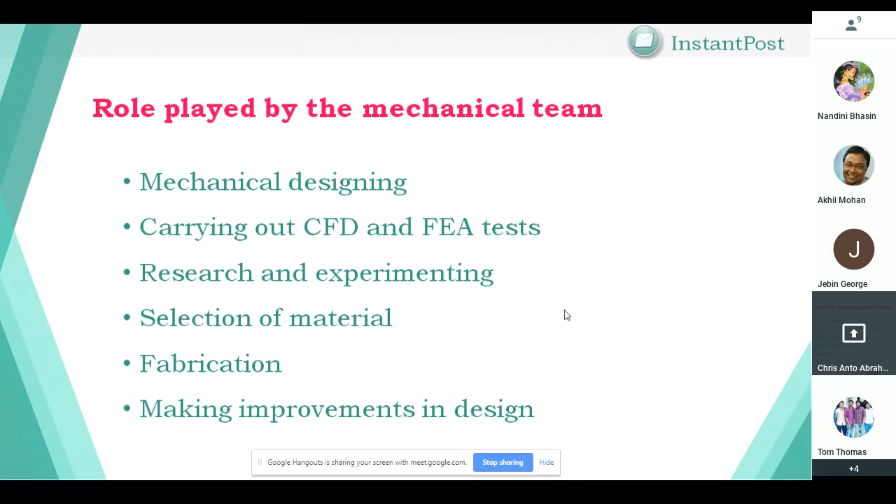Now, as Akhil explained, let's look at the mechanical ongoing projects, which include the bound print category and loose print category. Now, the machines that we are focusing on in the bound print category are the nozzle, mold structure, binding machine, and trimming machine. These machines will be explained in detail by the concerned member working behind it.

So that's the bound print category. Then there's the loose prints category. Here we have the kiosk and the CFD simulations.

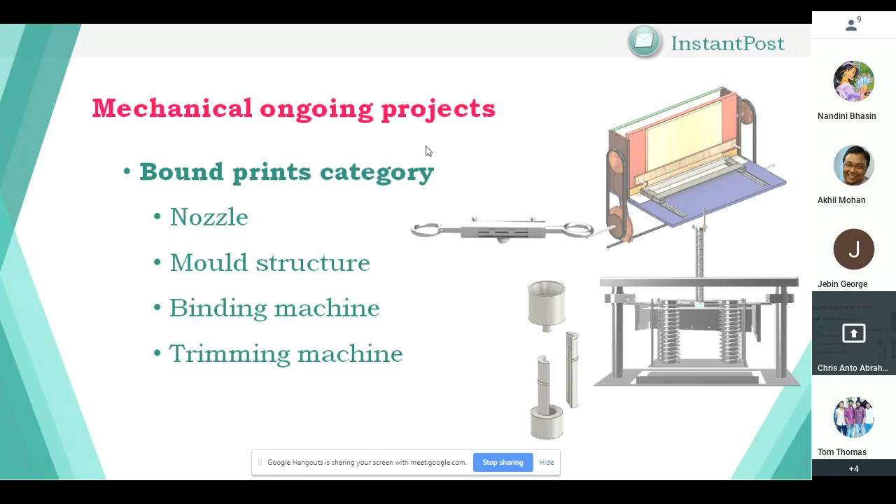So now let's go to our first machine. That would be the nozzle, and Tom would be the best person to talk about that. So let's hear from you, Tom. Thanks, Chris.

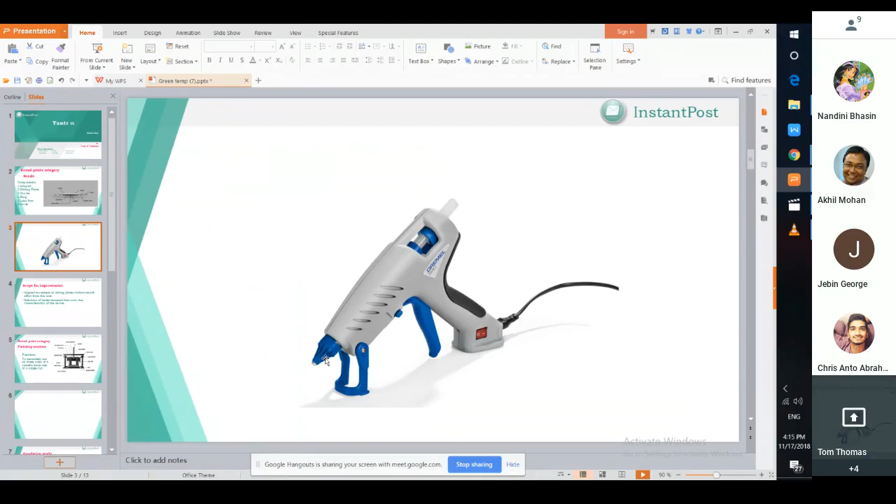As you can see on the next slide, this is the standard glue gun that we are using. There's only a single nozzle that comes along with it, and the nozzle cannot be used to have a different width size. That's where our product comes into picture.

These guides can move on both sides, and these rings actually control the movement of the guides, which can easily be done with the help of your fingertips. This inlet port is connected to the inlet of the glue gun, and that's how this whole mechanism actually works.

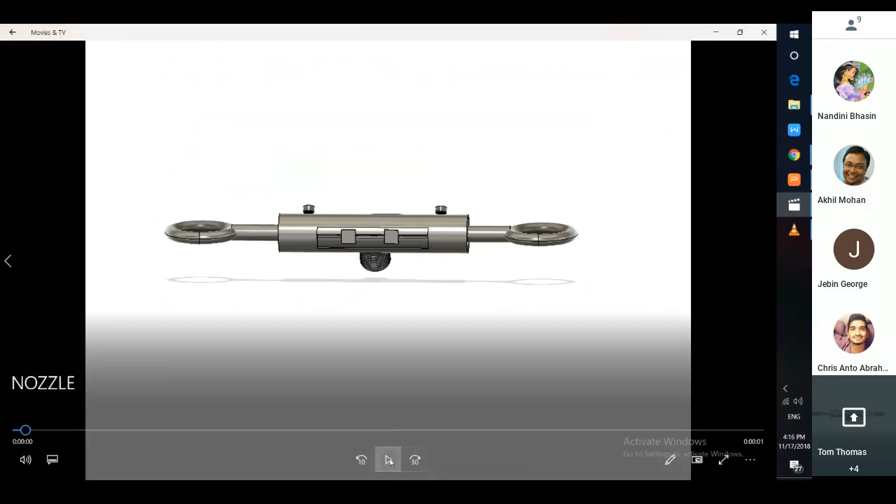Now I'll show you just an exploded view of the nozzle. Let's go on to the next slide.

That's the scope for improvement: aligned movement of sliding plates without much effort from the user. From the slide, you can see the user needs to use two fingers to move the slides in both directions, so that the guides move along with them. Reducing that would be our next objective, along with selection of a better material that suits the characteristics of this device.

Why we need to select a better material is a choice, because we need the glue to be in a molten state, and once the molten glue enters the adapter, the adapter, which is metallic, probably made of aluminum, dissipates a lot of heat. In order to reduce that, we would go forward with a better selection of material. So yeah, that's it about the nozzle.

So now over to you, Chris.

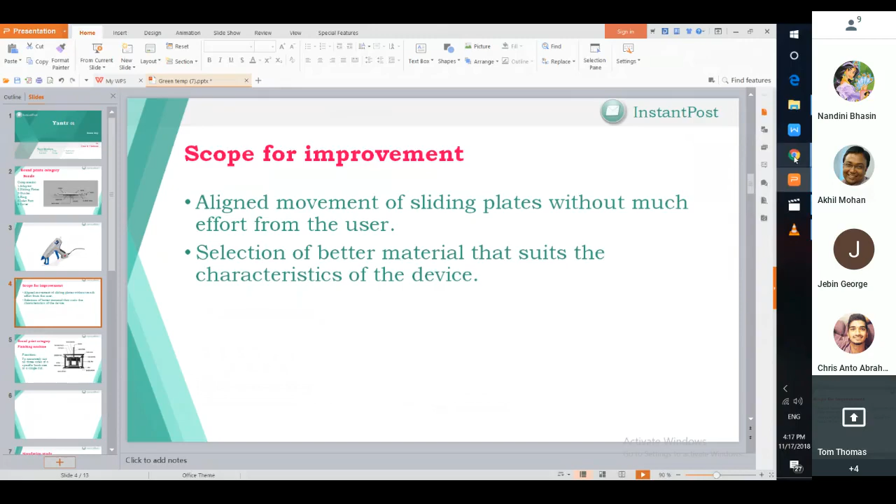Thank you, Tom. Now let's go back. Let's go to the next bound print product, which is the mold structure.

We know that while using a glue gun, a lot of glue would go to waste, and we don't want that, because in the binding process you utilize a lot of glue, and the glue gun will be working almost all the time. So to avoid that wastage of glue, we are introducing the mold structure.

The solid waste glue could just be put into the funnel, which has a heating coil wound around it, in turn connected to a thermostat that heats up the coil. That melts the glue. The molten glue then falls into the mold, taking the shape of the glue stick available in the market. So we are recycling almost all the glue that was going to waste.

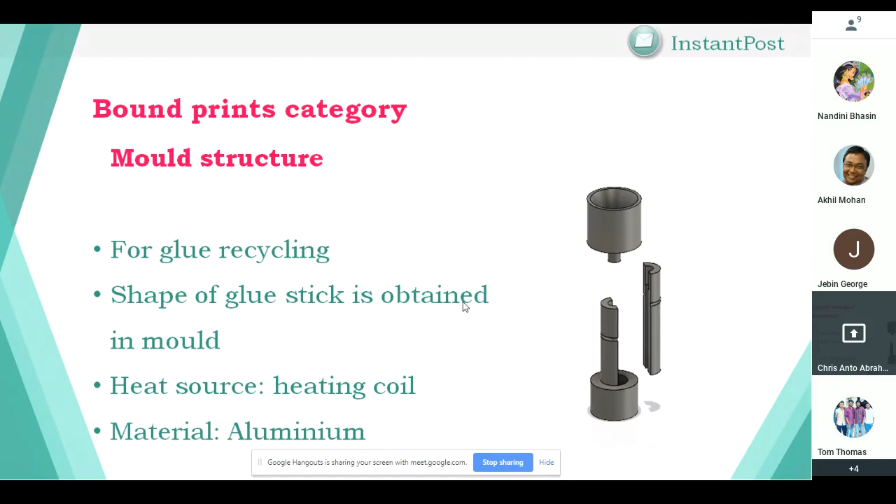Now let me show you each piece of this mold structure. That is the dismantled view, and the assembled view. Please watch this video.

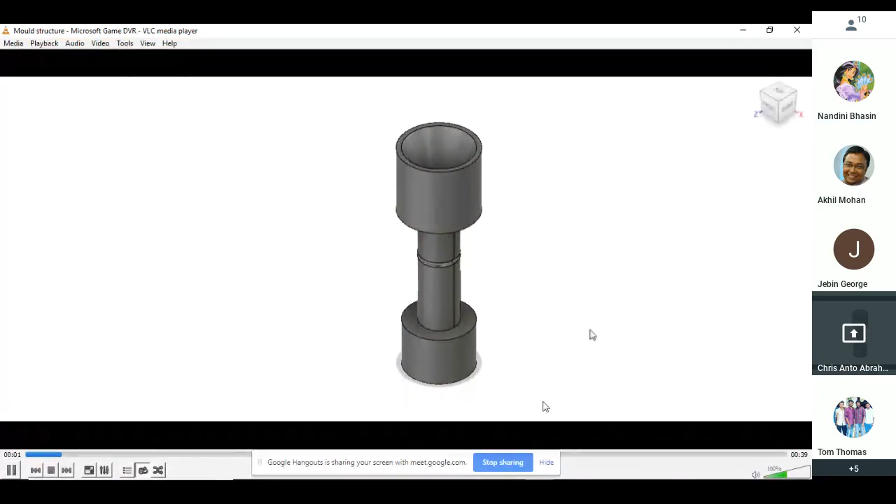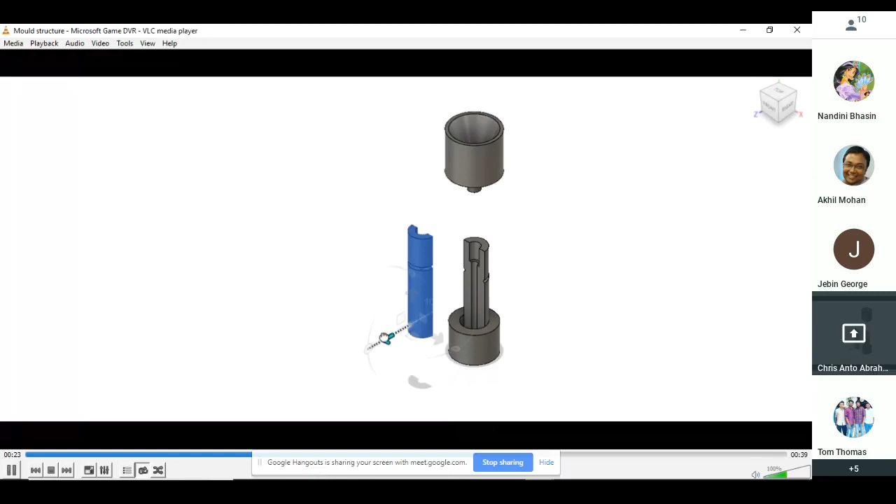Here, that's the funnel. The funnel can be removed like that. So after the glue is ready, I mean it's solid, the funnel will be removed like that. Then one piece of the mold could be removed. This way, the solid glue stick inside can be extracted.

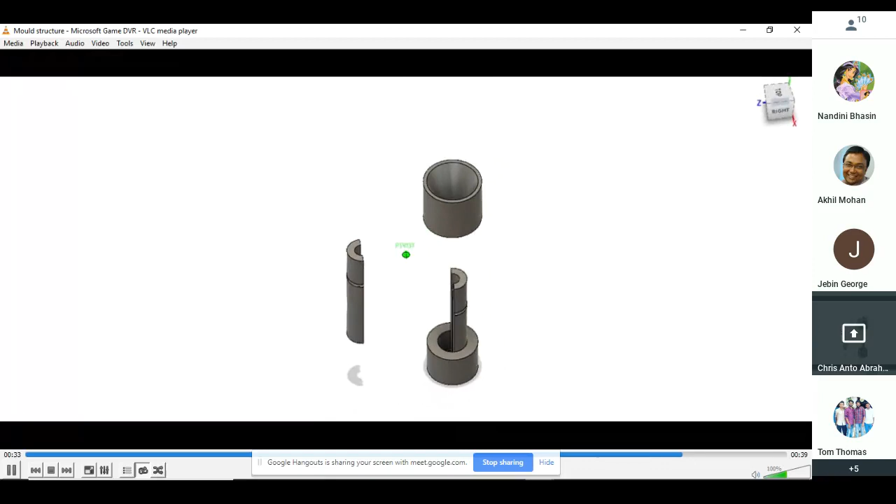So that's about the mold structure. And then comes the scope for improvement.

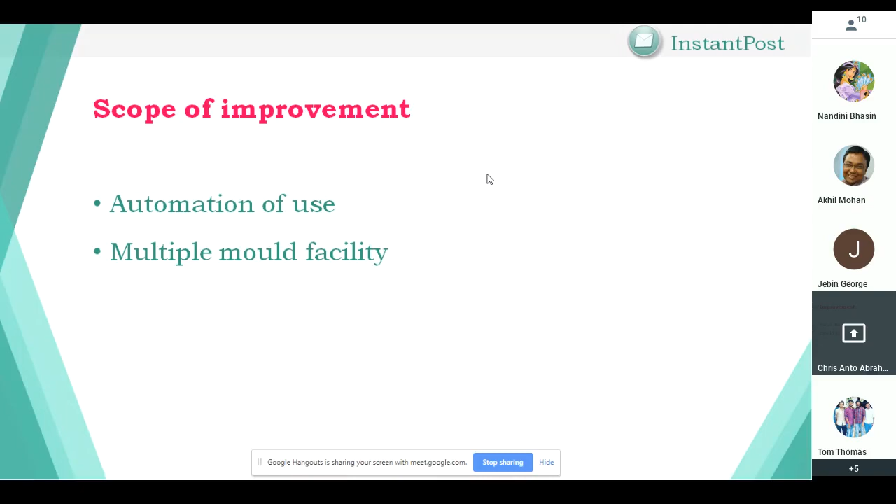So we want to automate that, as well as add a multiple mold facility. Here we are just recycling one candlestick at a time. We would like to recycle multiple candlesticks. So that is about the mold structure.

Now let's go to the binding machine. This binding machine is a manual machine which helps in bookbinding. Let's watch the video first.

Right, there you go.

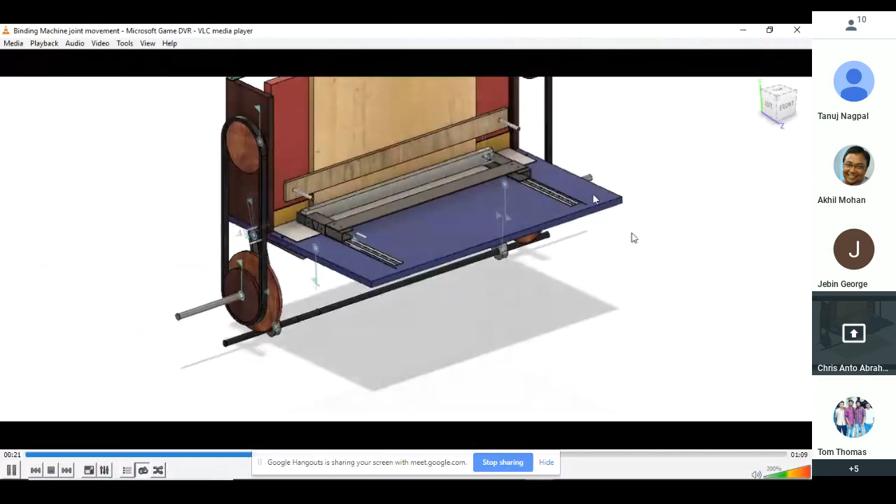So that yellow portion is going to be the book. It's going to be clamped to the back plate using this slab, and these are going to be the pulleys you can see, one over there and one at the bottom, connected by a belt, a timing belt. The white slab you see is the linear motion block. After watching the video, you will know the purpose of each of these components.

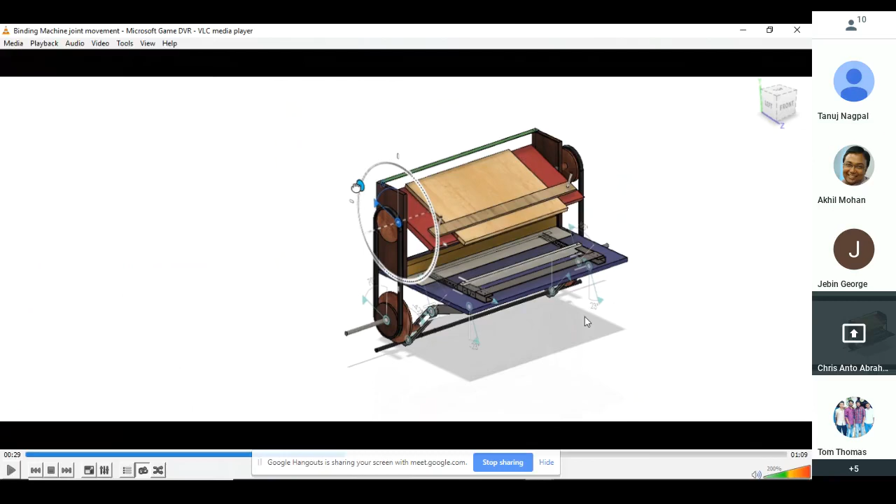So the book is going to be pulled up, and please note that this is the spine of the book, which needs to be glued. Initially when the book is placed, it's going to look like this along with the cover. The cover comes out of this slab, which helps the book clamp to the back plate. As the book is rotated, it goes up to 185 degrees, and at this position it rests on the back slab, which allows the book to stay stationary without falling back.

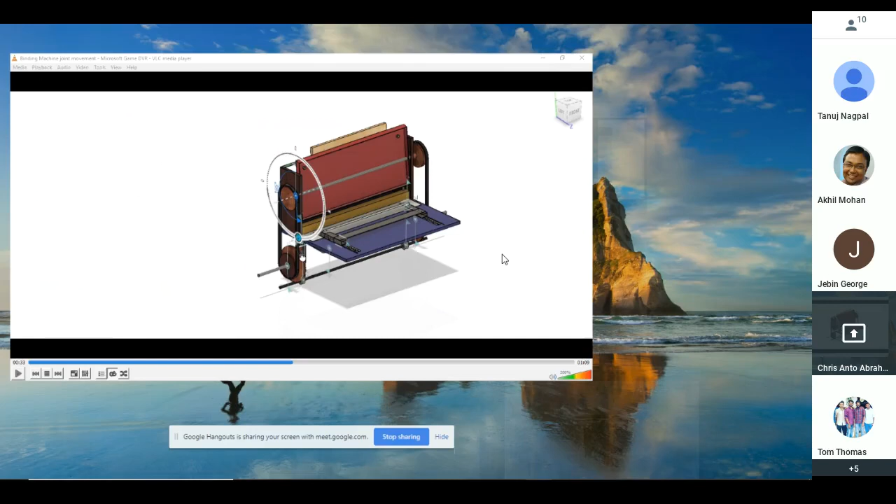Here the cover page is going to look like this, and the glue is going to be applied over there. Watch the rest of the video. After the glue has been applied, it's going to come back down.

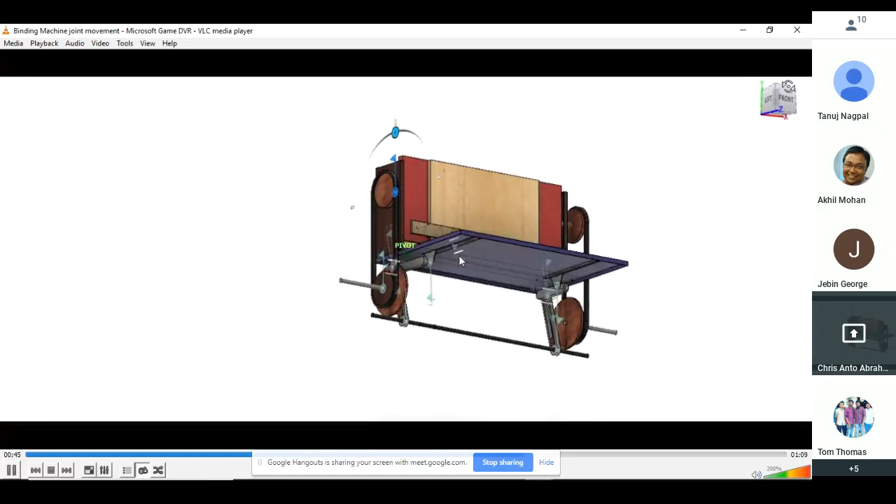Along with this rotation, you must have also noticed that the linear motion block moves back as well, with the help of this mechanism. This is called the Whitworth quick return mechanism, and if you watch carefully, you can see how the linear motion block goes back, utilizing the slotted link and a link which connects this slotted link to the linear motion block. Now, the purpose of the linear motion block is...

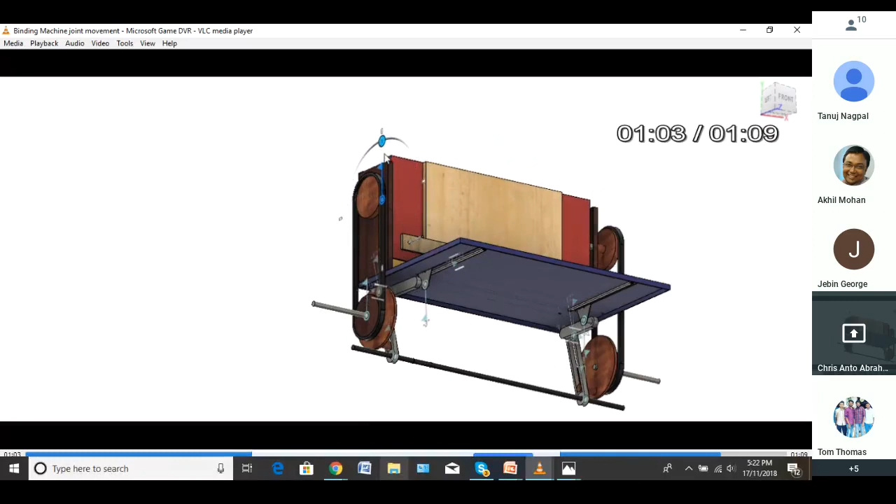After the application of the glue, when the book comes back to its initial position, the glue makes the spine, but it doesn't give that spine the finished shape it wants. So the linear motion block comes into use here, where it sandwiches the spine between the stationary block at the back and the linear motion block, which distributes the glue uniformly throughout the spine and gives it the exact rectangular shape.

So that is the whole working of the binding machine. This machine would be of great use in college campuses, because as we all know, students would repeatedly require this binding process for their projects or whatnot, and they would need it quickly and urgently.

In the conventional method, as soon as an order is given for bookbinding, an average vendor would take that order, the pages along with the cover page, to a bigger stationery shop which has a bookbinding machine. Now, there are bookbinding machines in the market, but they are not manual, and they cost a lot, which is why only these big, large-scale stationery shops are able to afford them.

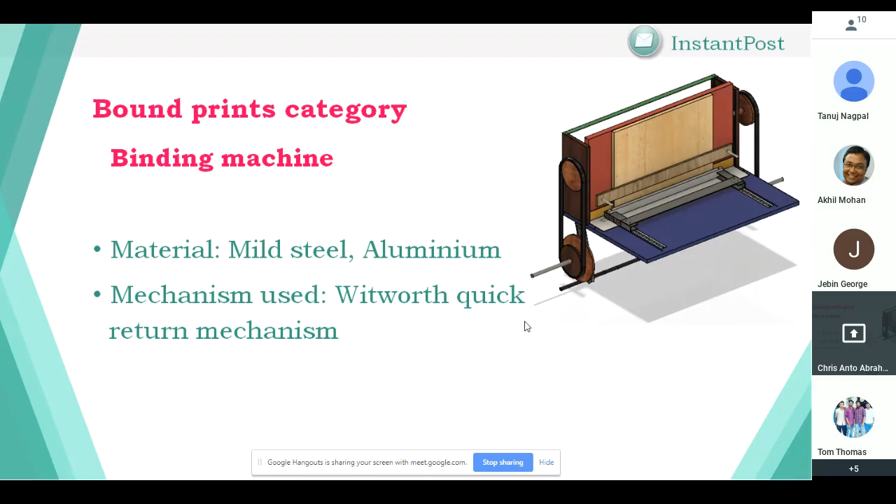So now let's look at the scope of improvement. Weight reduction is our main focus when it comes to this machine - weight reduction, lesser parts to assemble, and the assembly is also going to be much simpler.

Then we're also looking into semi-automation. Now, semi-automation means that currently each work - application of the glue, rotation of the book, bringing it back down - everything is done manually. Semi-automating it would mean the glue would be applied by the run of the glue gun, and that run would be automated. That is the semi-automation we have in mind.

Then complete automation would mean just placing the pages along with the cover page, and we will only see the book after it's been completely bound. That is what we mean by complete automation, and that is another scope for improvement when it comes to the binding machine.

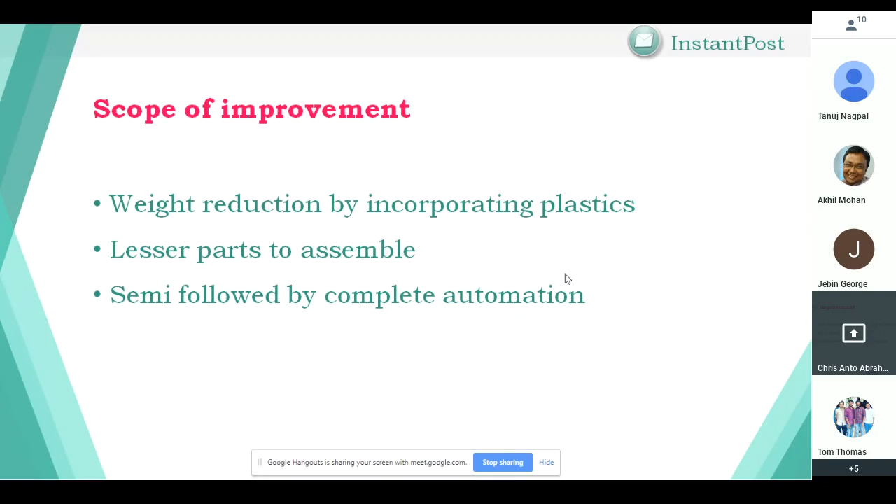Now, the next machine would be the trimming machine, and let's go back to Tom and hear from him. Thanks, Chris.

As Chris said earlier, once the binding of the book is done, the book needs to be properly cut into the specific size that the user requires. This is where the finishing machine comes into play. The basic function of the finishing machine is to cut all three sides of a specific book size in a single go. As you can see, the machine consists of a lot of complex parts.

Let me show you the video and explain all the parts one by one. This is the complete machine. The blue ones are the supporting rods. The green parts on either side are the block bearings, and there's also another bearing at the center. This yellow part is called the press head.

The function of this press head is to hold the lead screw, and this lead screw is from where we apply the force so that this top plate moves up and down. This brown portion is the book, and this red portion behind the book is the part that holds the book in place. The last part is the base of the whole machine.

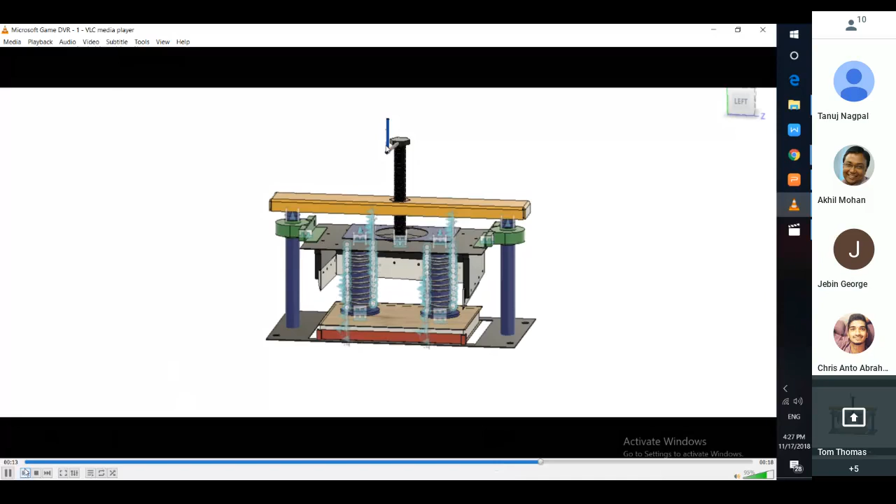Let me show you how it basically works. So this is how it actually works.

Once the spindle is turned, the top plate moves down along with the bearings. The bearings are attached to the top plate through an L-shaped plate, and this top plate is further connected to a blade support which holds the three blades. The silver colored objects are the blades, as you can see in the video.

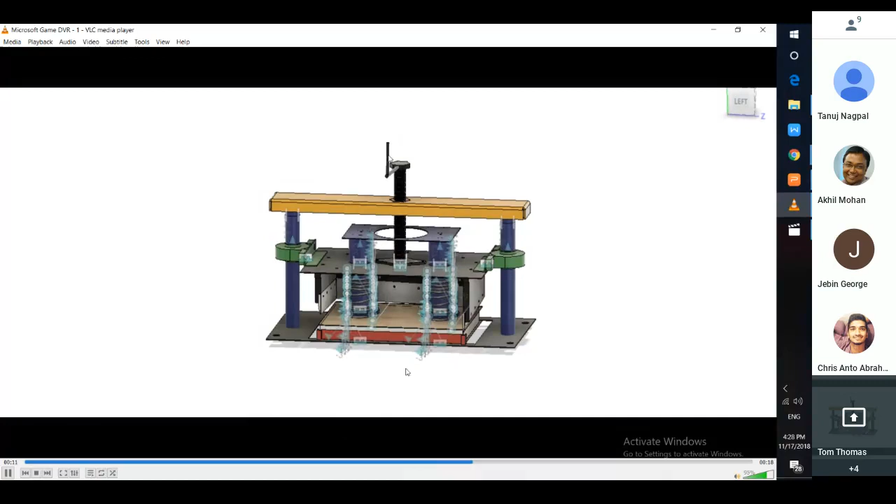Once it moves down, it cuts the book on all three sides, and the spring here is provided so that once the cutting is done, the spring pushes the top plate back to its initial position without much effort from the user. So that's the basic working of the finishing machine.

Now let's go into some simulations that I have done. Before that, I'd like you to look at two parts: the top plate and the blade support. These are two major components in this machine which come under a lot of stress and buckling.

What this stress means is that once the blade comes in contact with the book, the blade is under a lot of pressure. Since it's a thick book, the blade would be under a lot of pressure, and this stress would further be given to the top plate. So I have done stress analysis on these two parts.

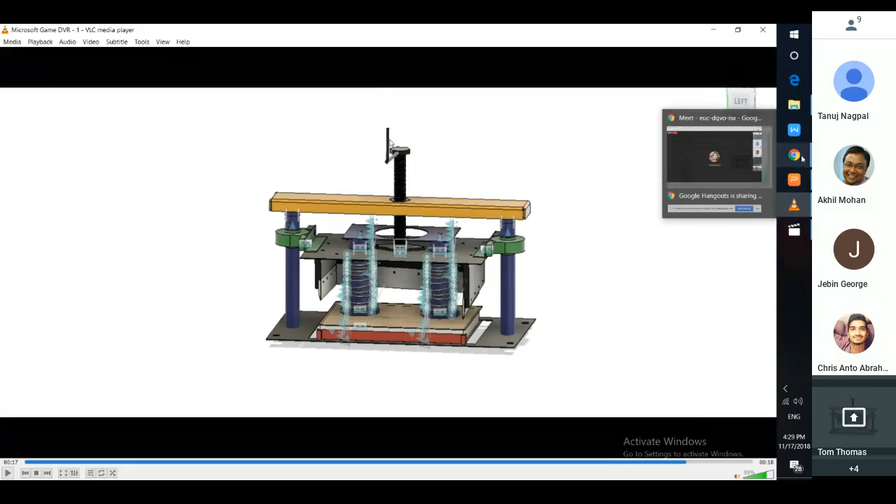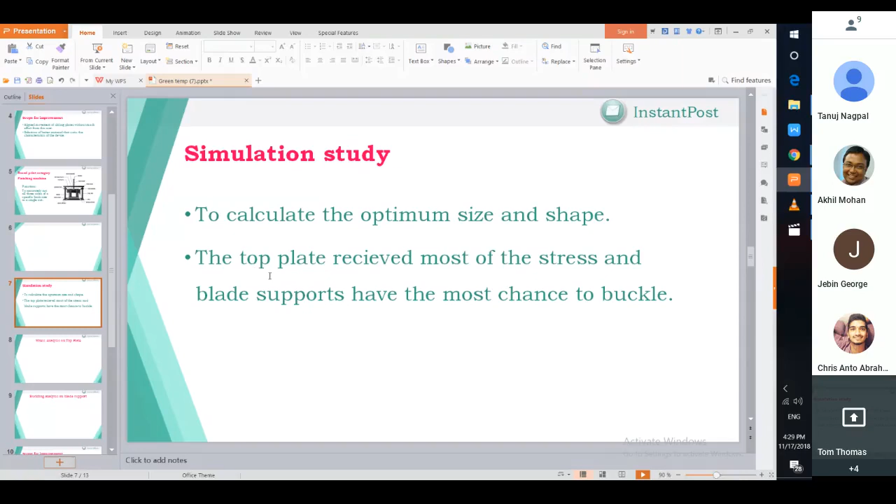Why is there a need for simulation study? To calculate the optimum size and shape of the machine parts, since the top plate receives most of the stress, and the blade support has the most chance for buckling. Buckling means to bend under stress.

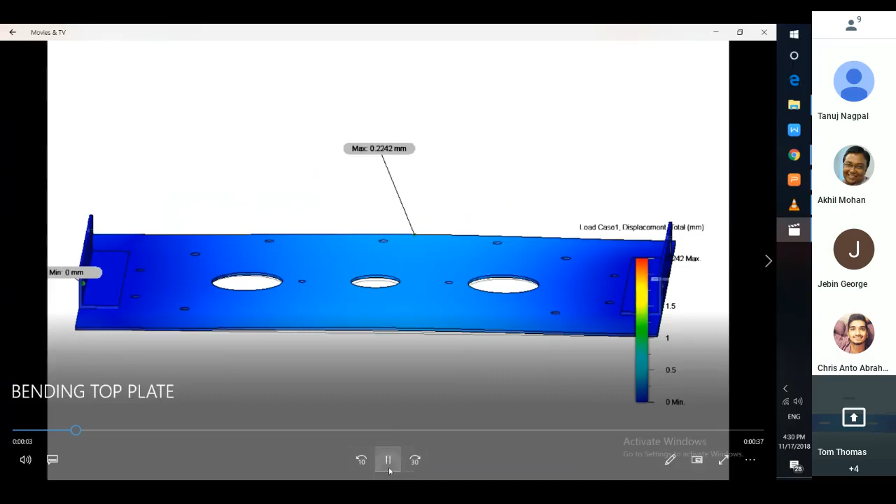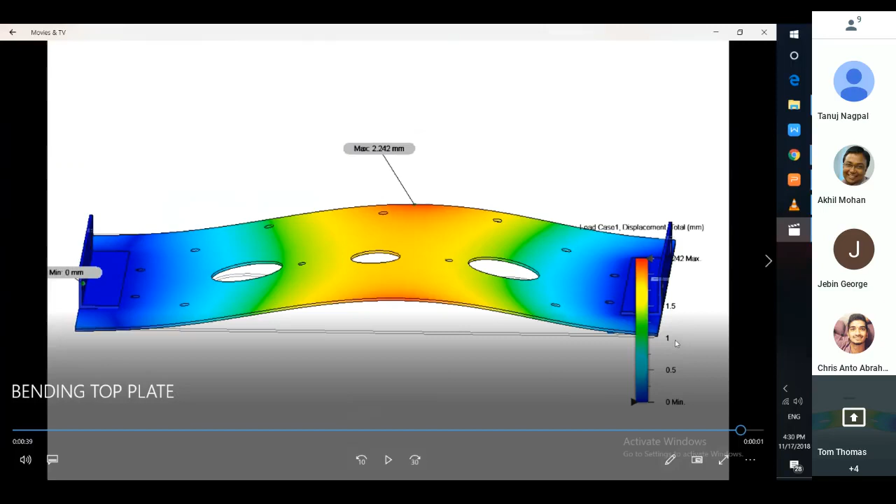First is the stress analysis on the top plate. This is an analysis that I had done for the top plate. As you can see, it shows the deflection at the center of the plate. As time passes, the deflection increases and reaches a maximum after some time, about 2.242 mm. This simulation indicates that such a plate with a thickness of about 1.5 mm is not a suitable option for the machine. That's regarding the stress analysis for the top plate.

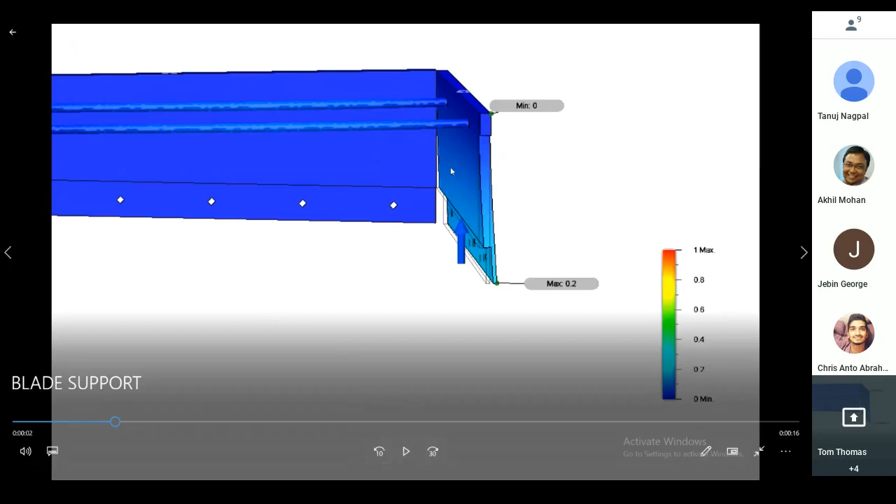Now comes the buckling analysis on the blade support. This is actually the blade support, and in these indentations we place the blades and screw them. A force was given on the blade support, and let's see how it reacts. The current deflection for the blade support is 0.2 mm, and as time passes, it further goes to a maximum of 1 mm.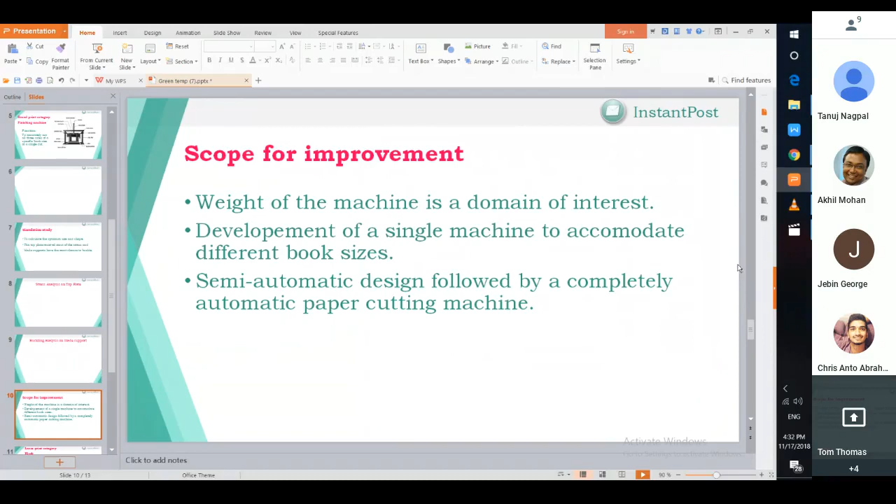Thank you, Tom. Now that's it about the bound print machines. Now comes the loose prints category. Here there's just one print happening at a time. That would be the kiosk.

Now kiosk is a joint venture by the mechanical team and the embedded team. Tom would be the best person to talk about this. So the kiosk, and followed by the CFD simulations.

CFD simulations are focused on the cooling system that we have inside the kiosk, as there are many components inside the kiosk which would heat up, and that heat has to be removed as soon as possible and most efficiently. So CFD simulations are taken care of by Jebin.

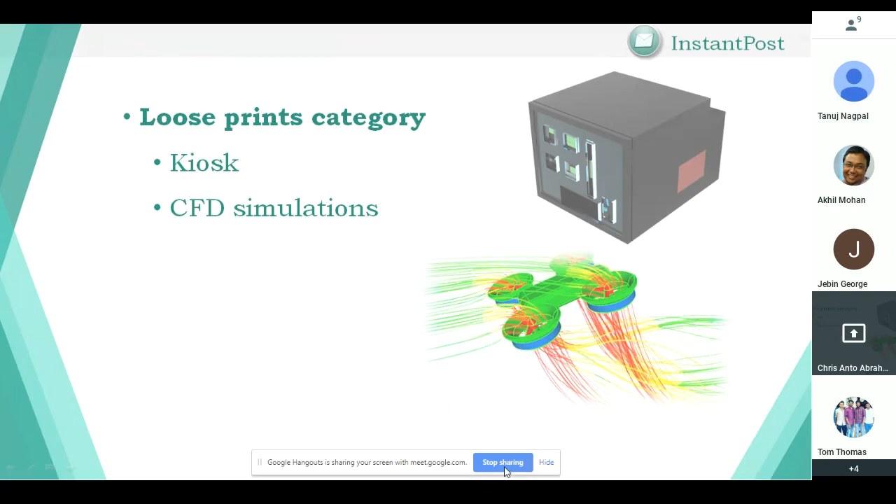Let me just explain to you what are the basic components of the kiosk. As we move to the next slide, there are a lot of components that come in front of the kiosk as well as inside the kiosk. Let me explain the basic components that come in front of the kiosk.

As you can see, the first category is the adapters, which include the keypad, LCD screen, RFID scanner, fingerprint sensors, coin acceptors, and magnetic card reader. And the components that come inside the kiosk are the printer casing, a UPS, a cooling system, and an SMPS.

As you can see in the figure, that's the door of the kiosk, the front of the kiosk actually. At the top left you can see an LCD screen, and afterwards a keypad. Then there's a magnetic card reader at the right and a coin acceptor at the bottom right, and a printer casing just to the left of that. Then a fingerprint sensor on top of it, and an RFID scanner to the left of it.

Let me first explain to you why we are actually creating such a system. This system actually comes under the loose print category.

How the system actually works is the user uploads his documents in PDF format into the company's website, and receives a verification code. He comes in front of the kiosk, enters the verification code into the kiosk, and receives the loose prints from the kiosk through the printer casing. That's the basic working of the kiosk.

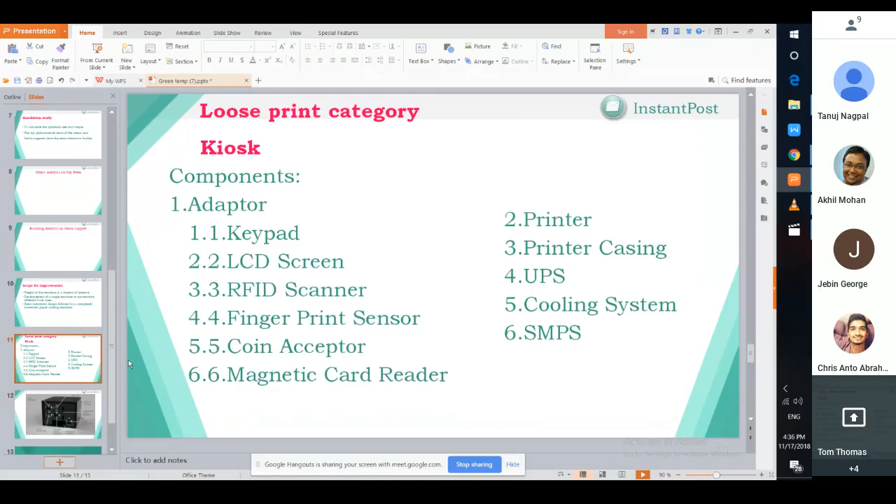There's a UPS which comes under the power supply system, and a cooling system, as Chris was explaining earlier, which would be used to cool all the components inside the kiosk. And last, there's the SMPS, which would be further connected to the electronic systems of the kiosk.

So this is what the front side of the kiosk actually looks like. The kiosk door consists of a metal frame, as you can see here at the side, and at the center a glass frame, which is actually acrylic. The acrylic part is given extrusion such that all these adapters are incorporated in the acrylic cover, and the acrylic also has an LED lighting system.

This is actually a representation of the system that we are planning to design, and this is actually the system that we are working on. So that's it about the kiosk front.

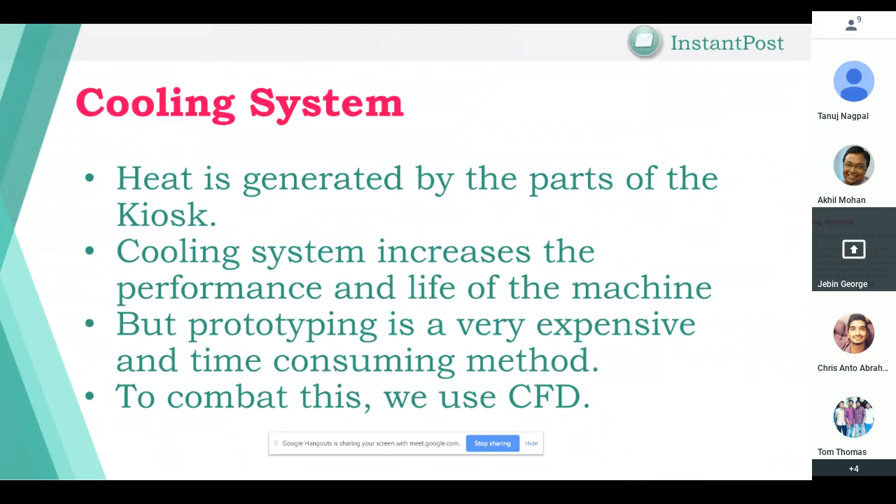So in order to combat this, we started using a CFD simulation. CFD stands for Computational Fluid Dynamics. It is a branch of fluid mechanics, which means it studies the interaction between fluids, that is gas and liquid, with its environment and its surroundings.

So let's move on to CFD. CFD is a very modern method of simulation and problem solving. It is a branch of fluid mechanics that combines modern day computing power with numerical analysis and data structures to predict how fluid flow would interact with the environment.

Numerical analysis basically means it uses a set of basic equations governed by physical laws. These equations predict how the fluid will interact and communicate with other materials that it is in contact with.

For example, if we consider an IC chip inside a laptop, you can visualize that there's heat transfer between the chip and the atmosphere. We can use CFD software to visualize how the inside air will interact with this chip, and what temperature and velocity the inlet fan should have in order to cool that chip. This can be seen all around us - the ceiling fan and home appliances we use are all based on designs that have multiple prototypes based on these CFD simulations.

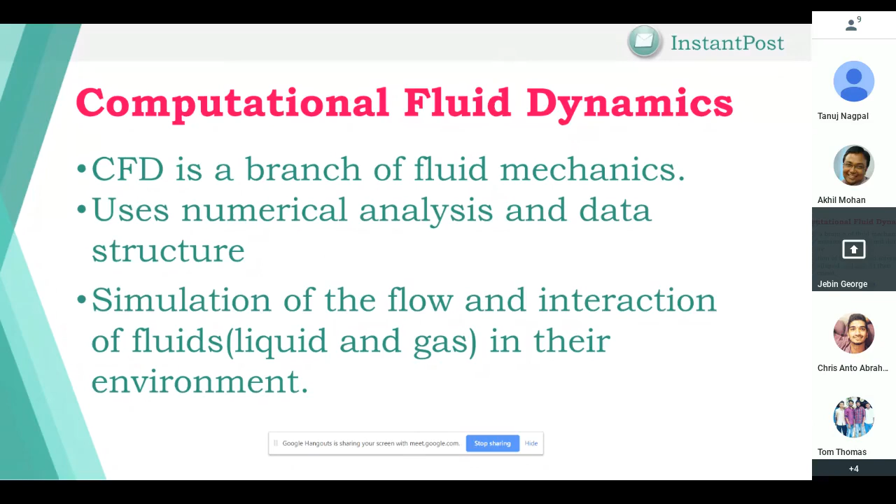So every simulation has three major parts: pre-processing, solving, and post-processing. Pre-processing means the creation of a geometry that needs to be solved. So basically, if we have a problem statement, let's say heat transfer, we want to create the geometry that we need and solve that.

In order to solve that, we can't solve the entire geometry at once. To simplify it, we need to divide the geometry into a number of small fragments. This is done by a process called meshing. Meshing helps divide the geometry and also the equations that govern it, so that we can get a result with very little error. You may also be familiar with meshing in a 3D printer.

So let's move on to solving. As I said earlier, the geometry is divided into tiny fragments, and each of these fragments is solved by particular basic equations that govern the laws of physics. There are different types of equations that govern different kinds of simulations, based on the conditions involved.

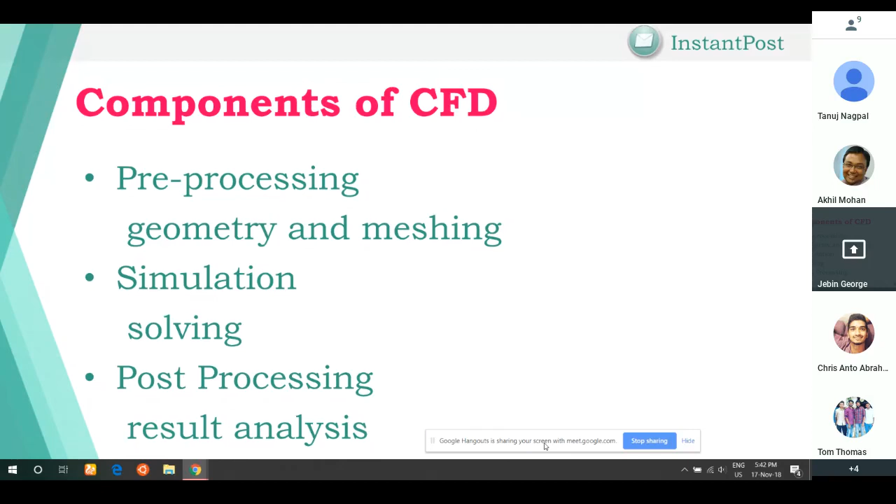Next is post-processing, which means the analysis and viewing of results. The results can be obtained and viewed in different software, and a mechanical engineer can visualize these results, understand where the flaws are with the current design, and improve upon it to create a newer, better version.

So let me move on to the advantages of CFD. Traditional methods of designing are based on build and test methods, including wind tunnels and other machines. These machines are not accessible to everyone, and the investment that goes into such experiments would be very huge. For a startup like InstantPost, it would not be feasible to use such experiments and machines.

In order to combat that, a lot of companies have moved to a cheaper method, the use of CFD technology with the help of high power computers, which is very cost effective and does not limit the capabilities. It is also very flexible and can be used in different problems, and can be varied according to the needs that we have.

Now designs can be easily based on simulation, making improvements within very little time and limited resources. It also reduces the limit of physical size. For example, we can even simulate the movement of a life-size ship through the waves, something that is impossible with other methods like a wind tunnel system or other machines that we already have.

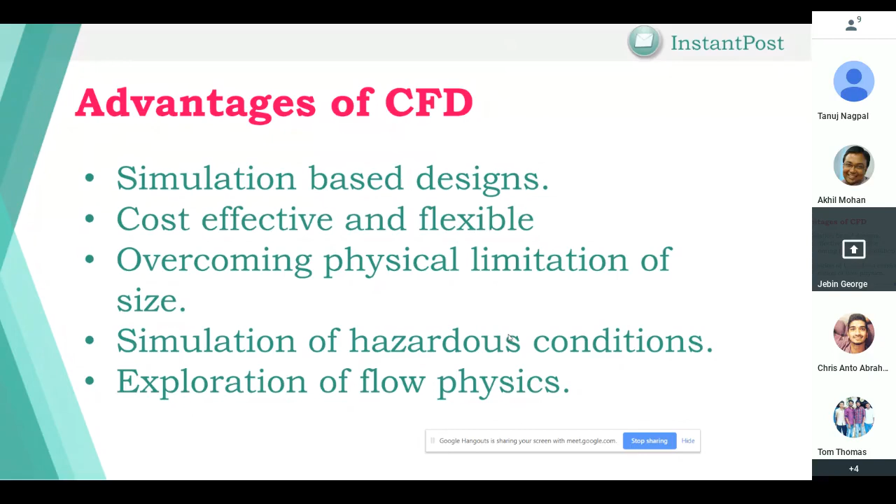Another advantage is the simulation of hazardous events such as explosions, how fire would travel, or the reactions of a poisonous gas, which are not possible to simulate or deeply study using normal methods. Also, a lot of research and theses are created based on these CFD simulations, which serve as the basis and are cited. This gives us a better understanding of the physics of day-to-day things, and a lot of researchers use this kind of data.

Let's move on to the applications of CFD. It has a wide range of applications, from, let's say, aerospace. It helps define how the wings and the entire plane will move without any drag, while having the maximum lift the plane can have.

Next, electronics - in IC chips and a lot of instruments, we use CFD simulations to show how they can be cooled and how effective it is. Next is hydraulics: pumps and compressors, devices that blow out air or other fluids, are simulated so there is no backflow of air or blockage in the system.

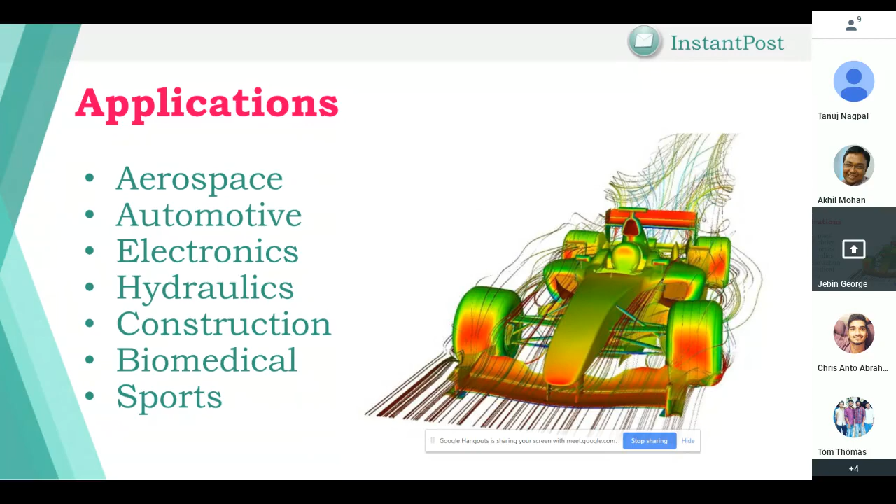Next, let's move on to OpenFOAM, the CFD software that we have been using. It's an open source CFD software based on C++, and it's a free software. It works with multiple solvers that cater to the wide variety of applications people may have, so people can use it according to the solvers that they want.

It is highly flexible and robust, and you can even create your own solvers based on OpenFOAM's initial standard solvers. It can be customized and tailored to the needs of the user, and it gives results that are very comparable and close to real life physical models.

Its capabilities vary from simple flow, heat transfer, acoustics, electromagnetics, and much more. It can even do financial simulations.

So it is not just limited to engineering, it's not even limited to mechanical engineering. It has parts in electrical, civil, and even sound engineering. Also, a large number of people, especially in universities, the students and professors, use it for their theses and research because of its open source and reliable nature. It is used widely by people across the world.

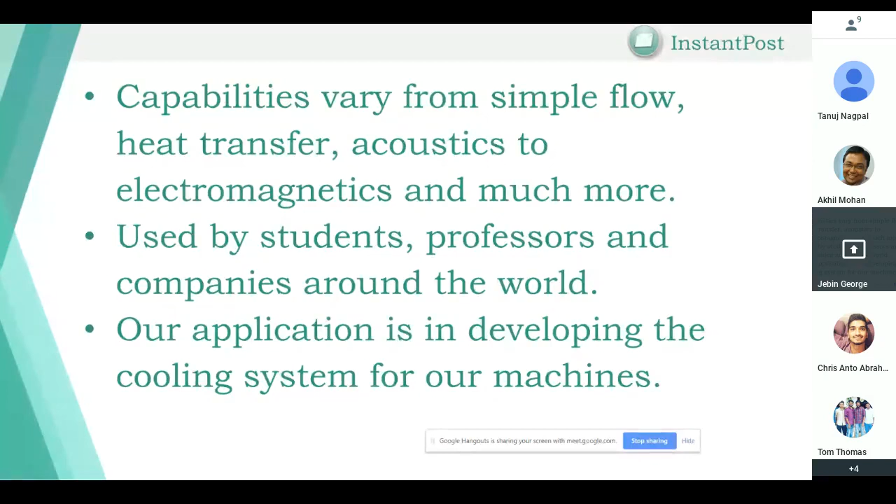Also in our case, in InstantPost, our application is in developing the cooling system. So we work in the heat transfer part of OpenFOAM, and we have been working with the cooling system with OpenFOAM. So it is giving us results that have matched with the prototype we already created.

So we also have two other softwares that we need for completing the OpenFOAM simulations. Initially I said that every simulation has three parts: meshing, geometry creation, and finally viewing the result. Salome and Paraview are two other open source softwares used along with OpenFOAM. Salome basically works on the geometry creation as well as the meshing part of the simulation, and Paraview is a software that works on the result part, viewing and analyzing it. So all three softwares work in tandem with each other.

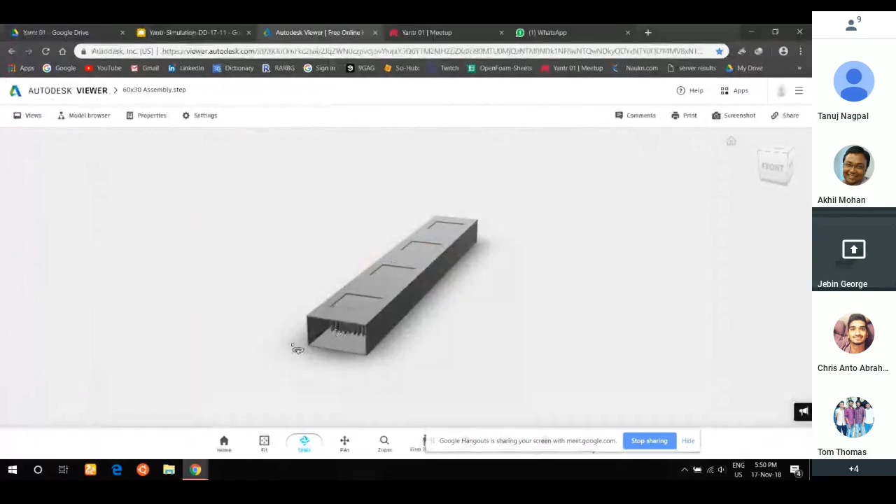Next, let's move on to a simulation that we had already done. So this is a basic cooling system setup. This is the cool side of the system, meaning this is the tunnel that will be inside the machine and will be cooling the system. As you can see, this is a tunnel, and inside are heat sinks.

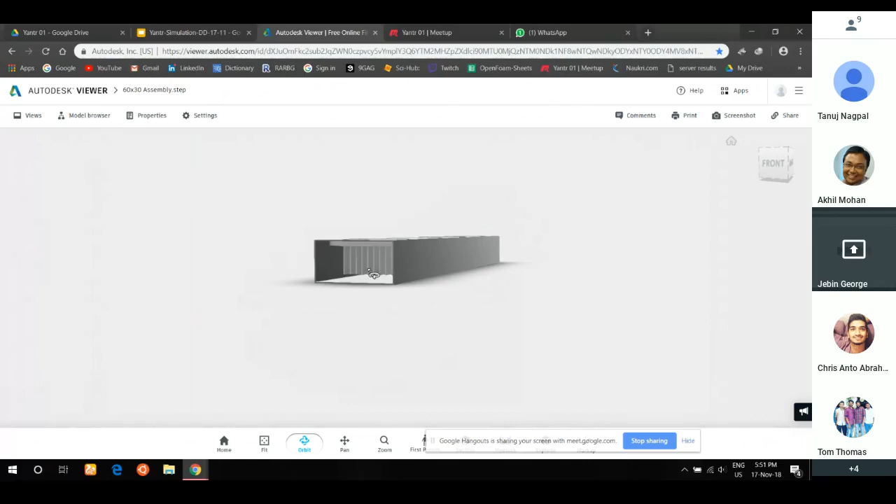A heat sink is just a metal aluminum part that will conduct the cold temperature to the air, and here we will have a Peltier plate. What the Peltier plate does is, when opposite polarities are given to it, one side will heat up and the other side will get cold. The cold side will be connected to the heatsink, and air from the inlet will be passing through.

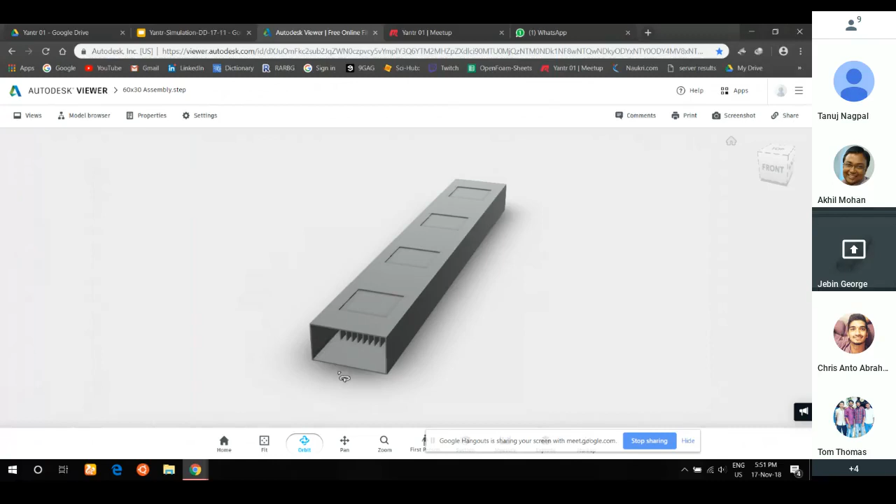The air passes through multiple heat sinks, and at the output it gives us a reduced temperature. This air is going to circulate within the kiosk, giving us a cooling cycle that reduces the temperature within the system, traveling through the entire system along with the electronic parts as well. So this is a system that we have been working on.

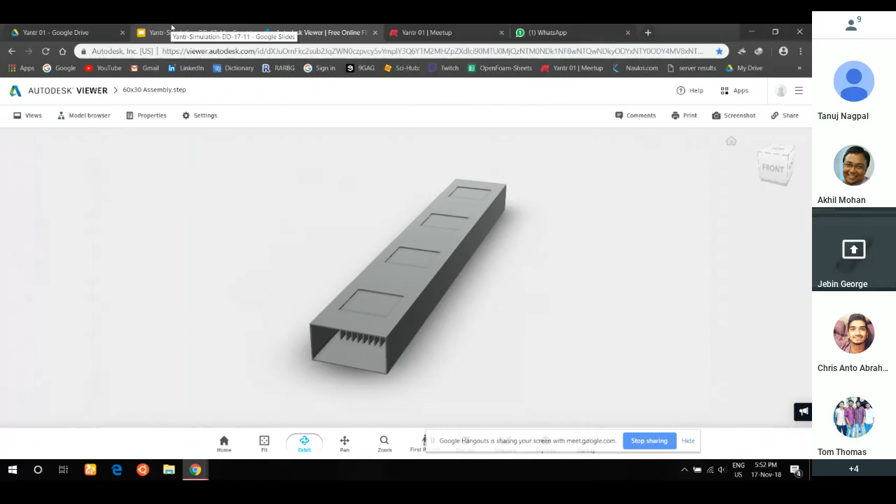Now let's move on to the simulation part of it. This is the simulated part where this is the inlet and this is the exit. As you can see, the hot air, which in this simulation is at around 300 Kelvin, which is 27 degrees Celsius, is passing through the tunnel at a velocity of 1 meter per second.

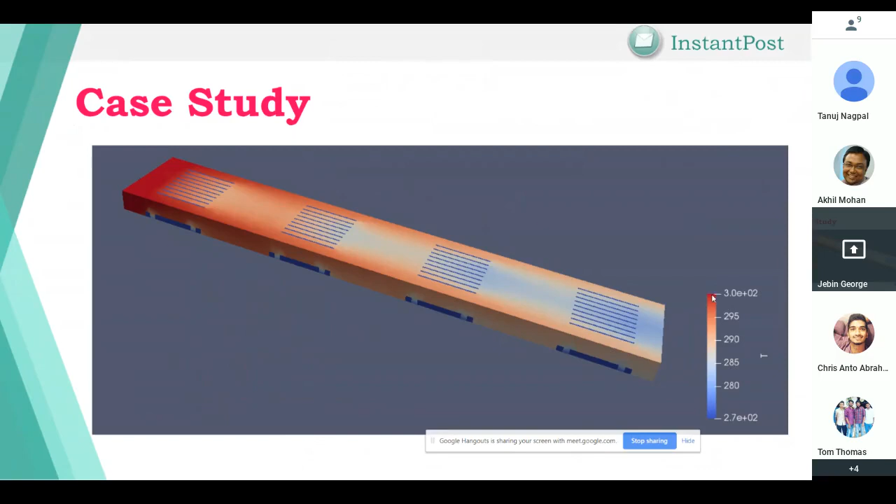As it passes through the successive heat sinks, which are at a temperature of 0 degrees Celsius, you can see that according to the temperature scale, the temperature is decreasing from 300 to around 280 Kelvin. As it passes through successive heat sinks, the temperature at the center is much cooler than the one at the side.

After further passing, it cools down until it reaches a temperature of around 280 Kelvin, while at the sides it's still at around 290 Kelvin. So what this teaches us is that we need to increase the number of fins of the heatsink, so that there is cooling even on the side. These kinds of improvements are what we want in the system.

This will allow us to create the next heatsink, which has more fins and equal distribution of air along it, so that we can have a reduced temperature. From 300 Kelvin, we have reduced it in the simulation to around 280 to 285. If we increase the number of heatsinks, we can reduce it further. So this is the kind of analysis and results that we obtain from such simulations.

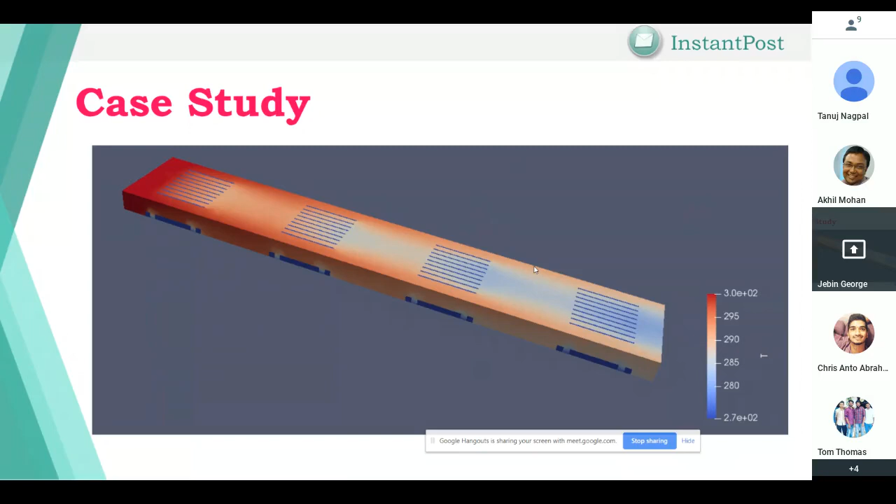So next is the automation part. Automation is a very successful part, one that InstantPost should be proud about.

So automation of OpenFOAM has helped us. It's not actually done by many, so it is a very unique feature to us. Automation is the running of the simulation on the server from the meshing part to the end. It completely runs on the server without the need for any human supervision.

Usually what we have to do is at each level check the simulation and see if there is an error, or do the next step. But according to the automation we have done, we just have to upload the files and it will automatically do the simulation and give us the results.

And it provides a common platform for anybody to view the results, so it's not limited to a person. Usually the entire simulation folder needs to be shared from one person to another. Instead of this, we have created a system in which anybody can view the results.

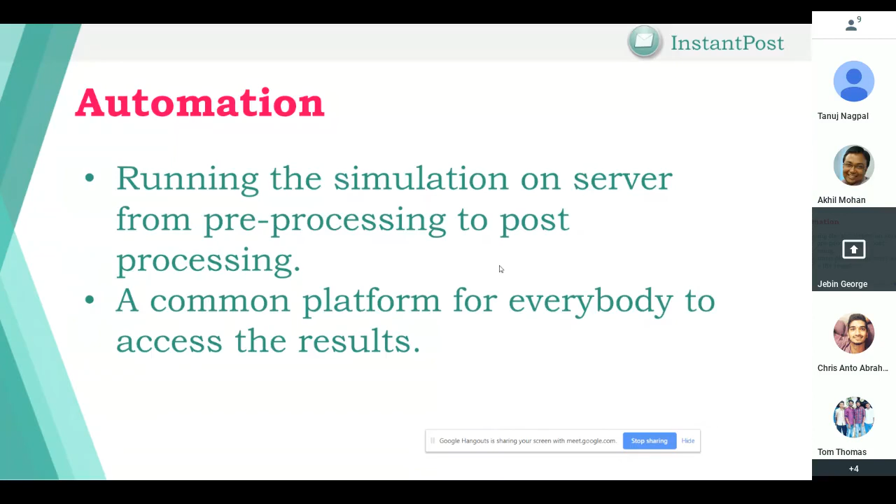So what next? Right now we are working on the tunnel, the cooling system and cooling system tunnel, just like the geometry you've seen earlier. What we want to do next is simulate the entire atmosphere inside the kiosk, how each metal part will heat up and how long it will stay like that, and such predictions. We have to do this so we can predict what temperature and velocity the inlet air should have, so that the cooling can be effective.

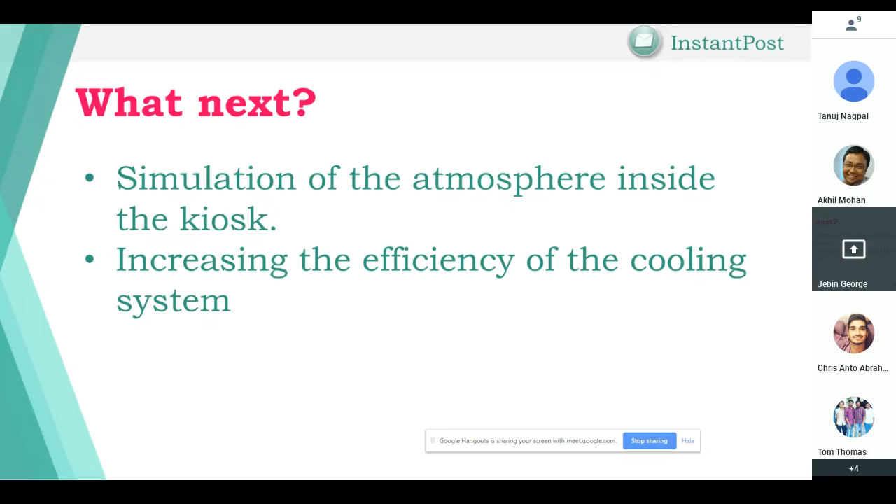Also, another part is increasing the efficiency of the cooling system that we already have. So these are the kind of challenges we are working on right now. That's it from my part. Thank you, now over to you, Chris.

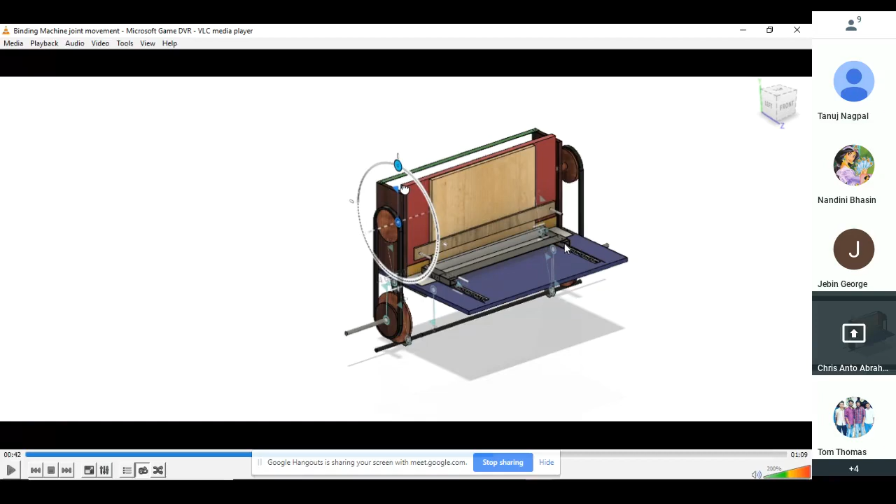Now same goes for the linear motion block. This block can also be fixed to this rail. That rail is not stationary, as you can see - it will move back and forth along with the linear motion block. The rail is what carries the linear motion block.

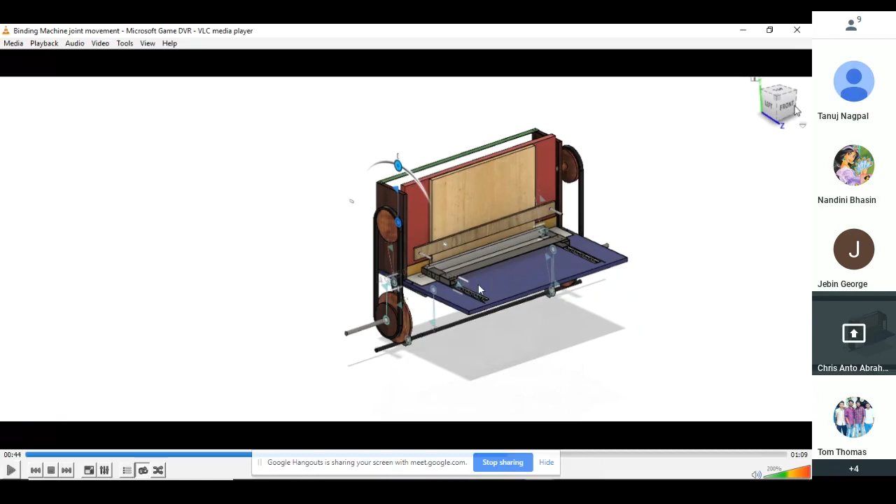So for a thicker book, the linear motion block can be moved back a bit. The book can be placed there initially - the pages along with the cover page placed and clamped. Then the linear motion block is adjusted at the spine, brought as close and tight as possible to the spine, then screwed on either end, which tightens it to the rail system, which carries the block back and forth according to the rotation of the back plate.

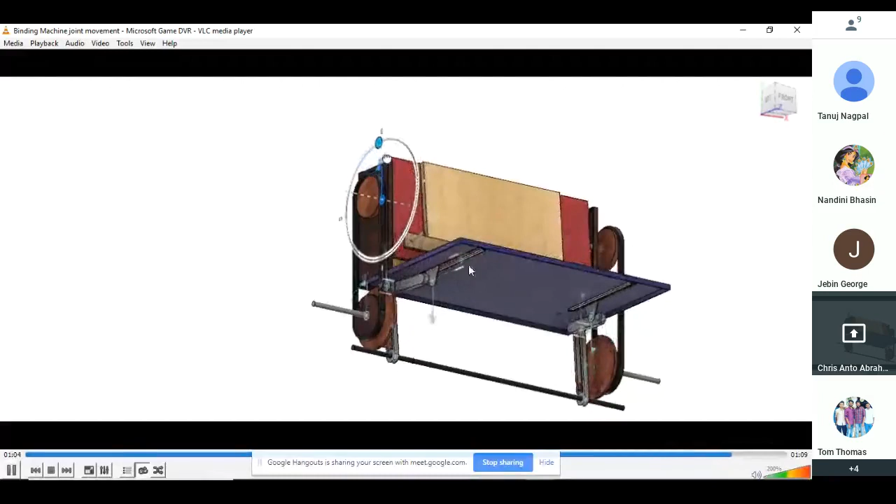And then it goes to 185 degrees and does the bind, comes back down, and that is where the book is sandwiched between the stationary yellow block behind and the linear motion block. So does that answer your question? Yeah, it does, thank you. Thank you very much.

Another question I had was, are there any limitations you can foresee for these machines?

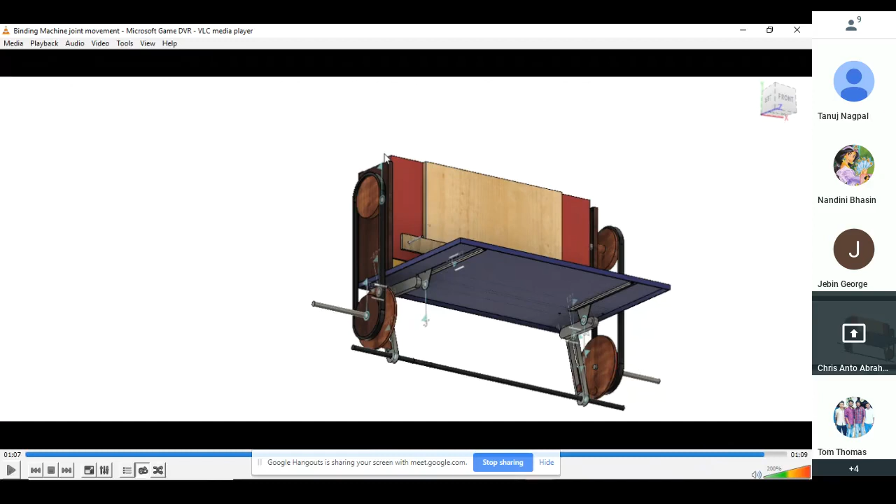Limitations for this machine - this is our first prototype, so it will definitely have limitations. It has to have limitations, only then we'll come up with improvements. The limitation we have here is that the pages and the cover page have to be properly aligned.

So you saw the trimming machine that Tom had explained. The whole purpose of the trimming machine is that the edges have to be cut so the book looks neat. Now, what if the pages are not properly aligned with the cover page? While trimming, the top portion - let's take an example.

If it's not properly aligned, say the top portion of the pages are going to be cut in the trimming process along with the cover page, and the bottom, it's only the cover page that's going to be cut if the pages and the cover are not properly kept aligned. So that is one challenge we are dealing with now, one drawback we have here.

Another drawback would be fabricating these components in metal. That adds to the weight drastically. And initially, in the first prototype, we have quite a lot of loose pieces which need to be assembled. The assembling of these pieces needs only one person, but will take quite a lot of time.

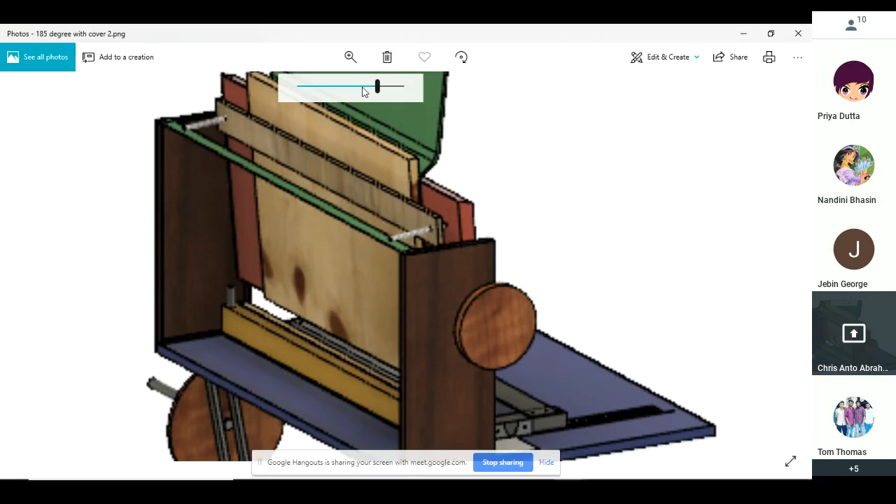This picture explains exactly why that's a problem. You can see that after the book has been tilted to 185 degrees, the cover page has to bend back so that the glue can be applied using the nozzle. For that cover page to bend like this, it has to be flexible enough. Hard covers will not allow for this. It's going to come right up till there, which will not allow us to apply glue on the spine. So as of now, hard covers are a problem for us, and we are working on it. That is another problem we are facing right now.

Okay, thanks, Chris. Thank you, Priya.

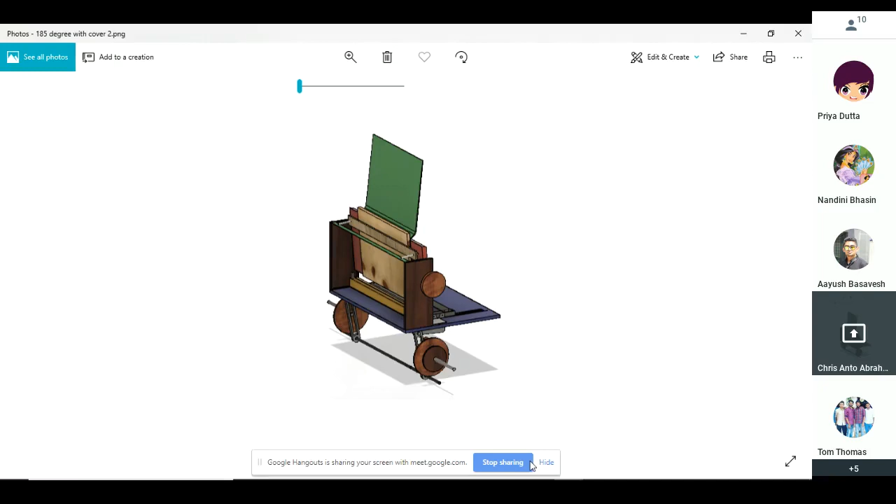Hey Chris, so in this bookbinding machine, there's no form of stitching or stapling involved, if I'm right? No, nothing at all. So how reliable and strong will your bound books be?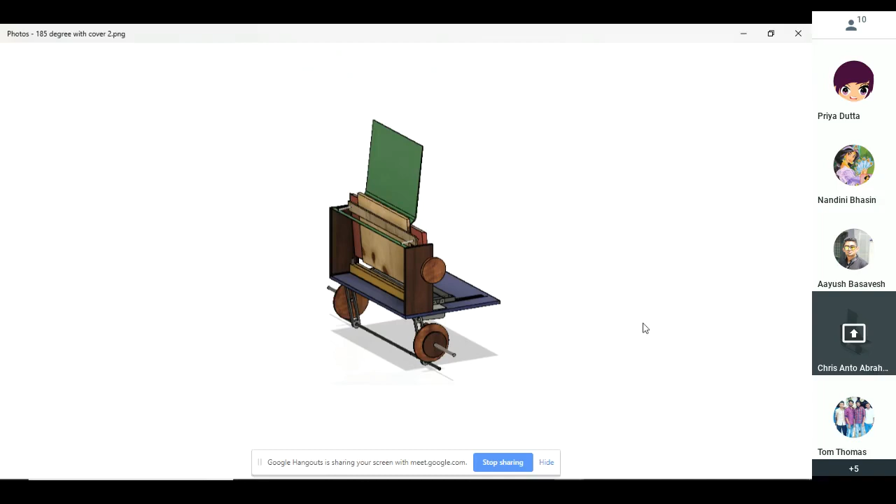The strength of a book totally depends on the glue that we use and the time we give for the glue to properly bind the pages and the cover page.

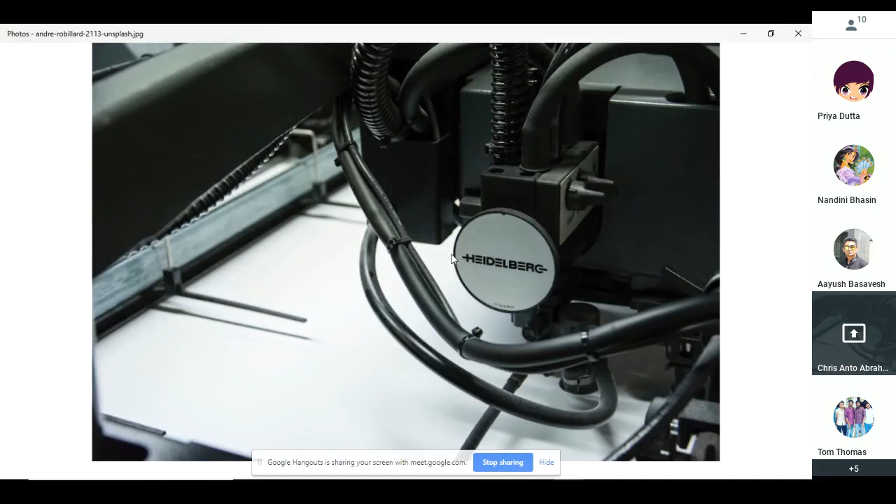Let's go to the video. Here care has to be taken while stacking the pages properly at the bottom along with the cover page, which gives a plane surface at the spine.

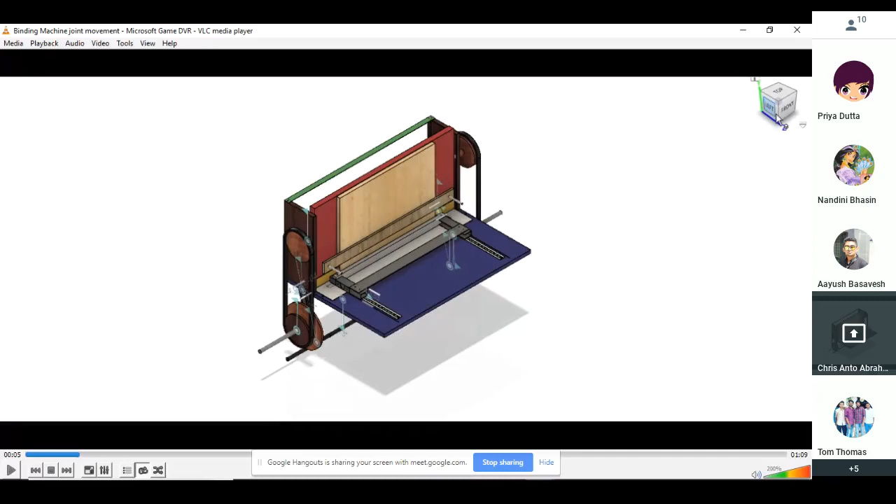When the book is at this position, tilted at 185 degrees, we want the spine of the book to be perfectly straight, with none of the pages going up or down, so that the glue touches each and every page and fixes it firmly with the cover. So it is quite reliable as long as not much force is given on the spine.

But like any other glue-bound book using any other machine, the strength of the bind is totally the same.

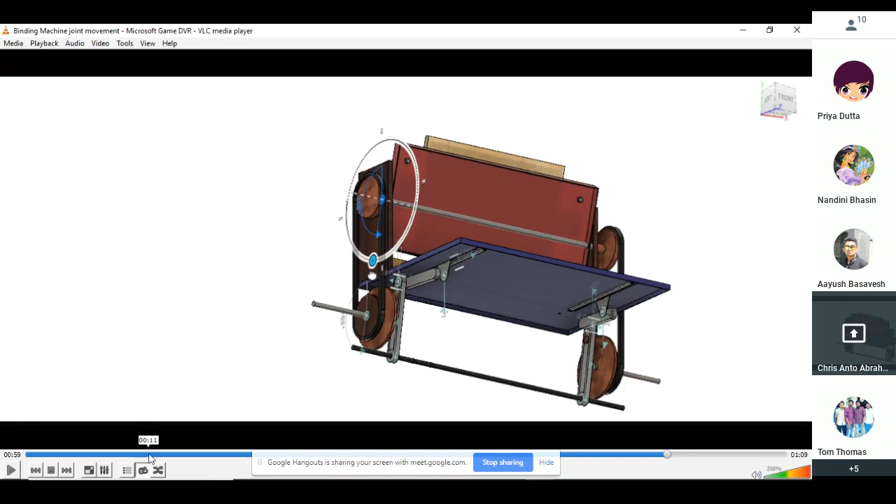Won't the glue, if excessive glue is applied, damage the papers? Since only the glue is holding all the pages together, is there a chance of it dripping through the papers and damaging them because you're not using a stitching mechanism or something like that? Since the glue will be wet, is there a chance that the paper becomes soggy and the entire document set is damaged?

Okay, so we have done trial runs using the nozzle. We have our first prototype of the nozzle ready, and there are no such cases of the pages getting damaged or soggy, because the nozzle allows only so much glue to be deposited on the spine. We're adjusting the width of the nozzle according to the thickness of the book, and there is barely enough gap for a thin film of glue to pass through the nozzle and fall on the spine. This glue also solidifies quite fast.

So there is no such case where the pages get soggy or damaged. And the linear motion block makes sure that the glue is deposited evenly, so that no particular portion of the spine gets more glue, which could lead to damage. So the linear motion block makes sure of that.

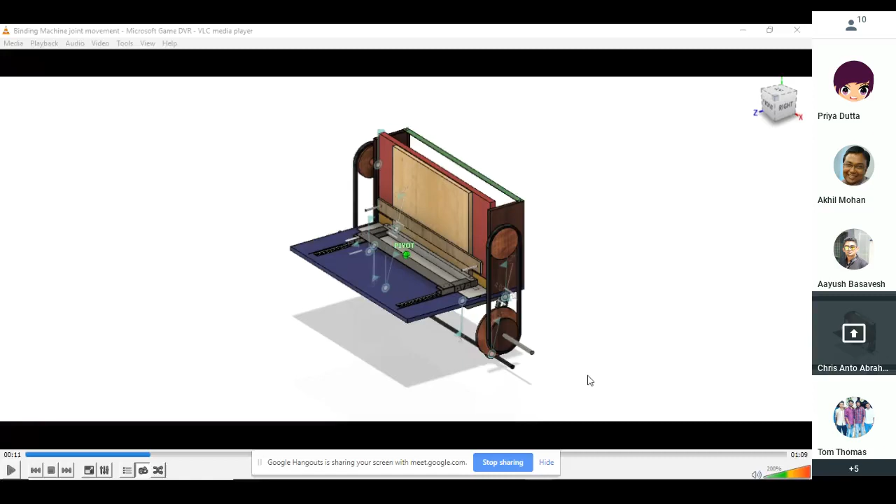So as you can see here, these two parts called guides are actually controlled by these rings, which are further connected to the sliding plate. So if you have a 5mm thick book, we could use these rings to control the width of the opening to be about 5mm, and place this easily over the spine of the book, and move it along the spine so that only a small thin curtain of glue comes over that 5mm thick section, and no further glue gets wasted or deposited over the spine. In a way, we can ensure no glue leaks out of the page once it's covered.

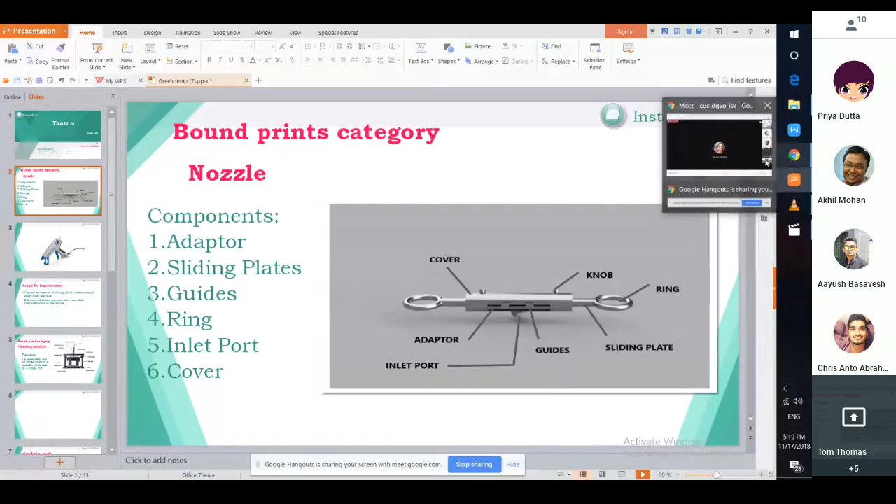Okay, let me add to that answer. Ayush, the question you asked about books that are much thinner than 5mm - right now, this particular binding machine won't be able to support that thin bind, and 5mm has to be the minimum thickness to be used on this book binding machine. This is the range we're building it for, but we can always modify the machine and keep iterating to accommodate all the actual requirements, since we're at the beginning stages where we first need to assert that machines can work durably and produce consistent results over a long period of time while being used.

So these are the immediate attempts we have in mind at this moment, and as we move forward, we'll definitely work on all the actual requirements college students may have. Right now, particularly with the books, our main interest area is to serve the faculties - a number of faculties have to get their books published, and in many cases what happens is they get only a few copies printed, for which they have to run around a lot. In such a scenario, we want to provide them an on-campus solution where they can print a few copies easily using our binding machine or the tabletop infrastructure the mechanical team spoke about. That's the immediate target we have in mind.